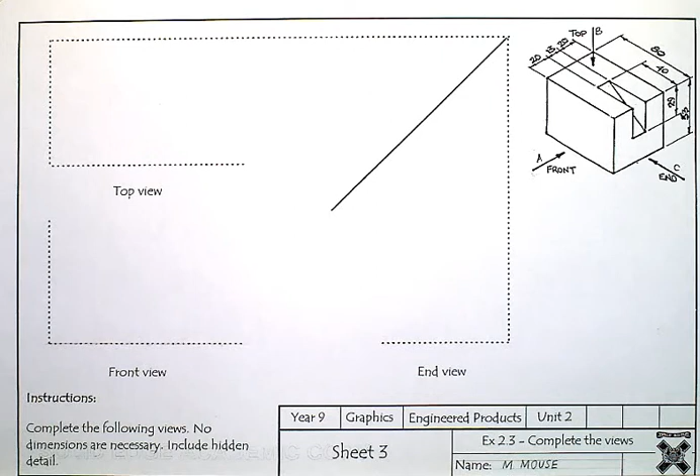Okay, this is exercise 2.3, complete the views. In this we're going to translate an isometric drawing to an orthographic drawing. Okay, a few more of the lines have been taken away. We still have some helpful hint lines there.

Okay, so first thing that's very important is have your t-square flush against the side of your board. You need to set the drawing up so all your lines line up with the t-square. That makes sure that every line that you draw will actually be parallel to the existing lines that are on there. So with that set up, I can tape that down.

I've put my name on the drawing already, and I'm going to begin to take these dimensions and place them onto an orthographic view. So here we've got a front view. This is our front view. We've got an end view looking to the right side, and it's sitting to the right, and that's your end view. And then you've got a top view, so it's looking straight down like a bird's eye view from above. So A, B, and C.

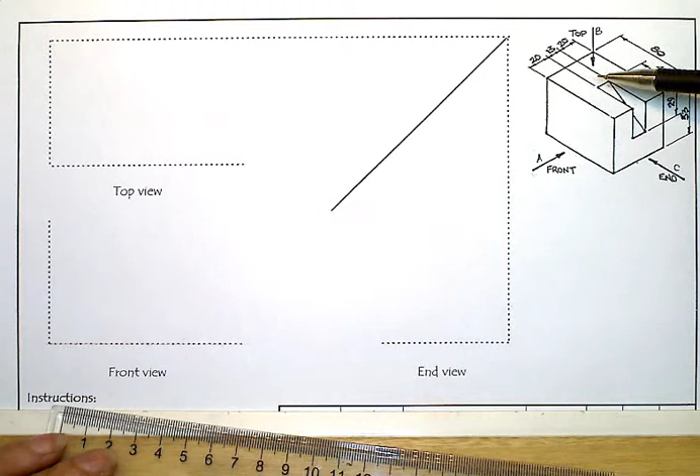We'll start with the front view, then we'll go to a top view, and then we can go to an end view, just in that order. We always start with the front view because that should give us the most information. So if you're choosing a front view, try and choose the angle of the object that will give you the most information. Okay, so the overall width of the object is 80, so the first thing I'm going to do is measure and mark out 80 along that line.

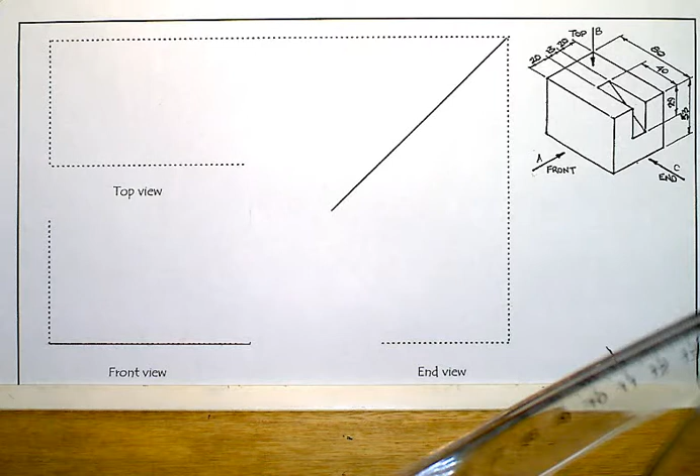Okay, I'm going to draw that line in. I can see here it's going to be a solid final line, so I'm going to just draw over that existing line. This is where it's really important that you've lined up your t-square properly with the existing dotted line that's on there. Okay, from that point, I'm going to box in the front view, just really light with construction lines.

So I'm using my 45-degree set square to give me that angle, which is going to be important later, but also the verticals I'm going to draw with that. I don't use my ruler at all. If I used my ruler, the lines would not be vertical and horizontal, you'd be able to tell.

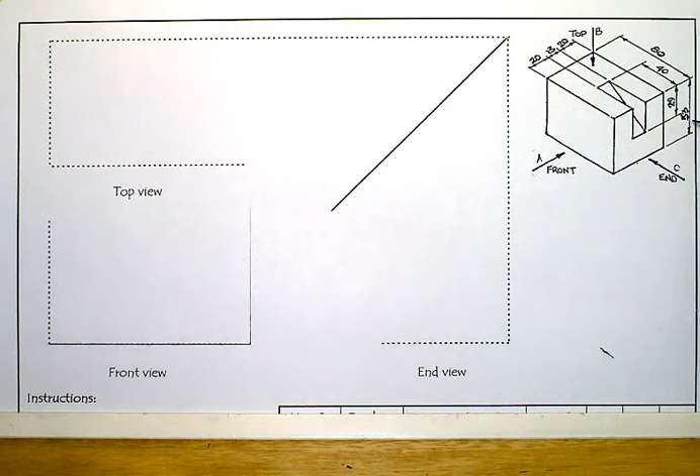Okay, so we've got that height there. We've got another height here which we might measure and mark out. The height being, I think that says 53. Okay, so let's measure and mark out 53. T-square out of the way. So 53. Making sure that's accurate. Mark that out. The light point.

T-square together with my set square, going to make that line to that point along the dotted line. Okay, so there is the edge of my drawing. All things are sitting the way they should. It just should go straight over the top of the dotted line. There we go. Okay, that's a bit better.

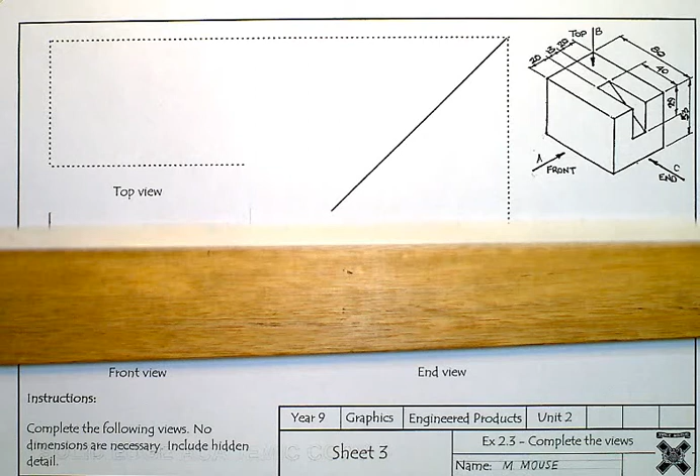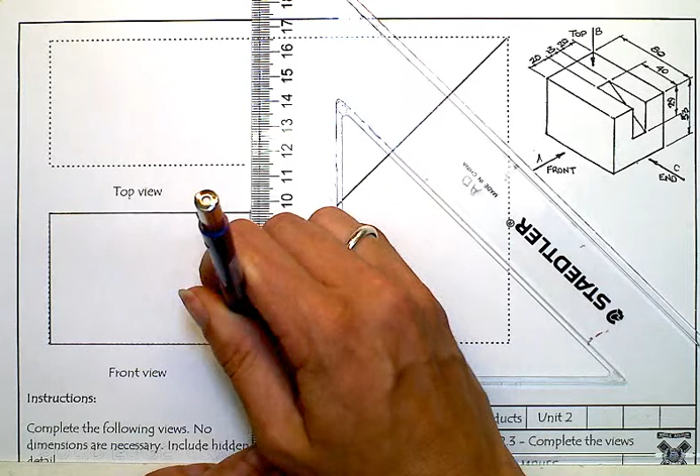Right, so I've got the height and I've got those edges there on my front view. I'm going to bring that height across. I could probably firm this in. The problem with firming in straight away is if I make a mistake, it's going to be very hard for me to go back. You're going to see everything, even if I try and rub it out. Okay, so there's my front view. You can see it's really just a very plain front view.

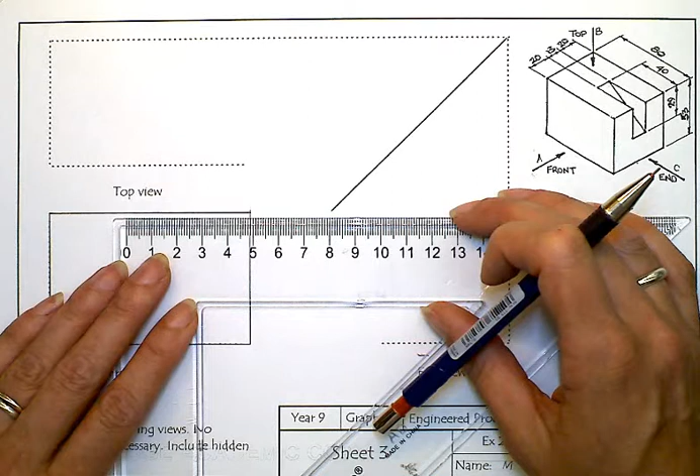The important thing that we have not yet put in is the hidden detail line, which comes across here. It's going to measure 40 across the top and 29 down the side. So we're going to measure and mark very accurately 49. Okay, and sorry, 40, my mistake. That's why you double check your measurements. 40 and 29 down the side.

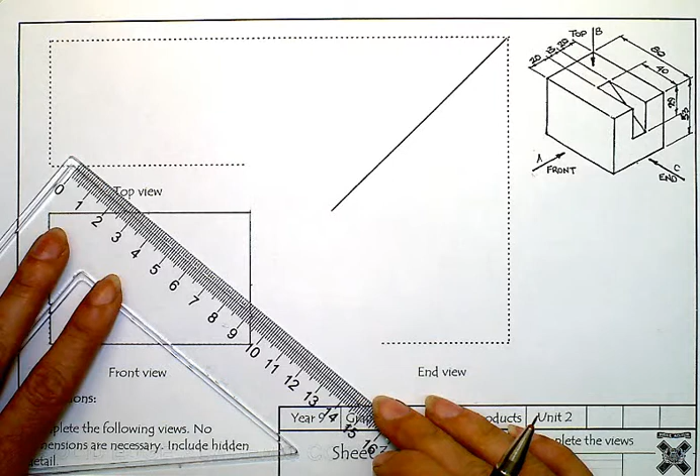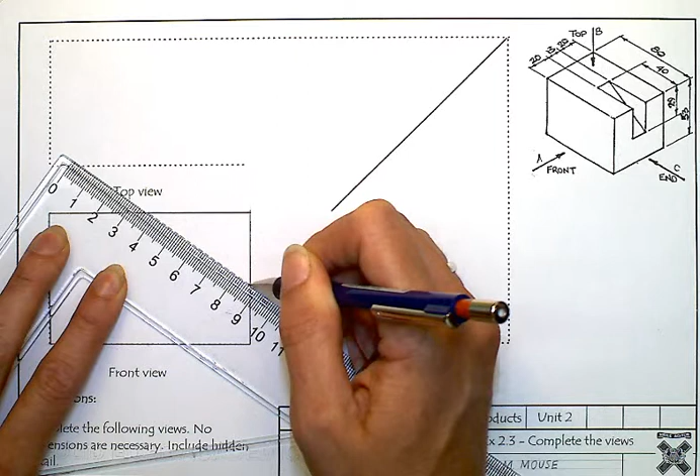Okay, now with those 2 points, I'm just going to line them up and do hidden detail. Now hidden detail is actually a lot lighter than my outline. It's sort of half the weight of my outline line. Okay, so there we go, hidden detail. Just to clean up any little stray marks there, just to keep the drawing as neat as possible. Cleaning up.

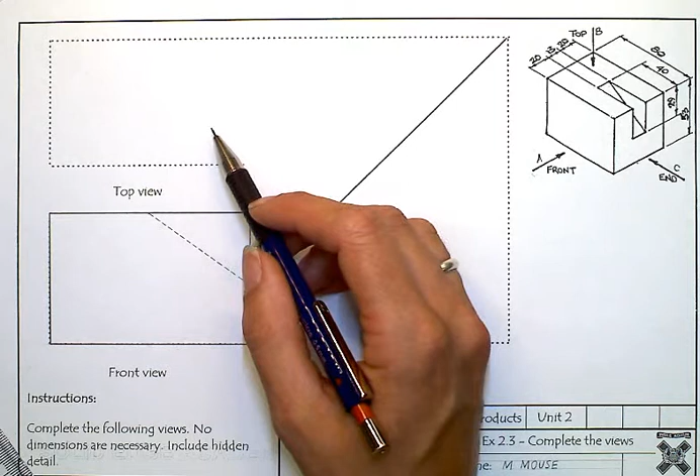So at this stage, I've got my front view. Now I'm going to translate all of these measurements onto my top view. So using t-square and set square together, I'm going to mark out the width of the top view. So it's going to be exactly as wide.

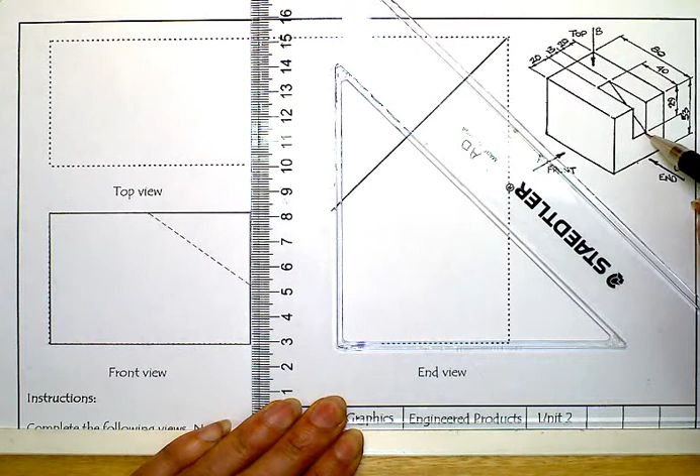I'll look at that top view. Now there's going to be a gap in the top view, but it's filled in down here, so we could probably say that's going to be firmed in. Okay, now as far as how wide it is, it's going to be just as wide as the bottom view, so

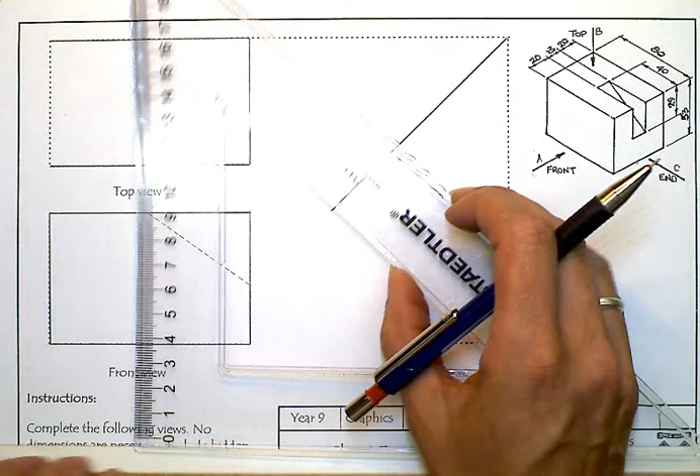firm that in. Firm in the outside edges, making sure you've got the right points. If I went out here, it would look a bit messy. It would be harder to tell where the object began and finished. So, okay, I've boxed it in. Now in this case, I've boxed it in with firm outlines because I know for a fact that that is going to be visible on the top view. I can see that there.

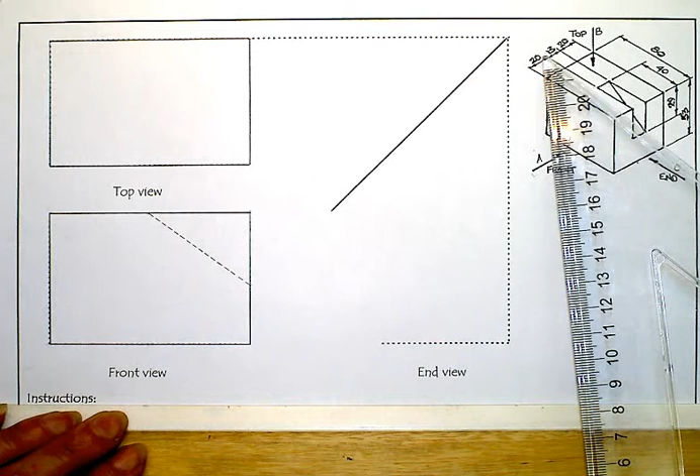Okay, now we've got a few little details that we still need to put onto the top view, such as this cutout in the middle. So we've got some measurements that we need to translate onto the side here. So we've got 20, 13, 20. So let's measure and mark that out. Okay, might do it on this end, because that's the end we need it on. So 20,

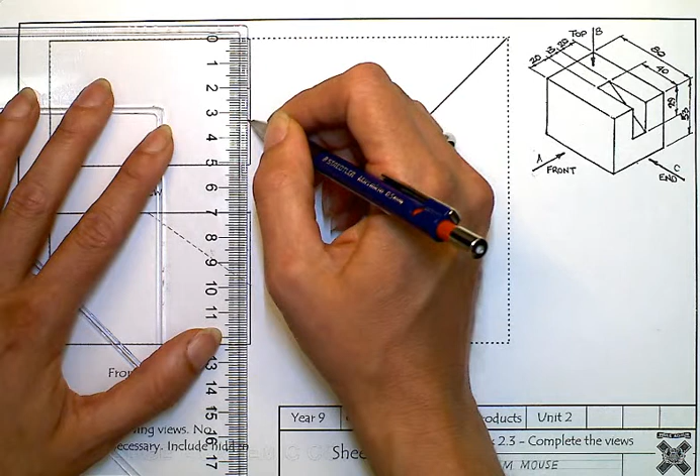mark, 13, might do 20 out from the other side, 20, and then just double check the distance in the middle, it's 13. Looks more like 11 to me, so double check that, which is interesting. 20, 13 would be more here. And then 20, okay, I'm just going to do 20 in from each edge, and the middle can be smaller.

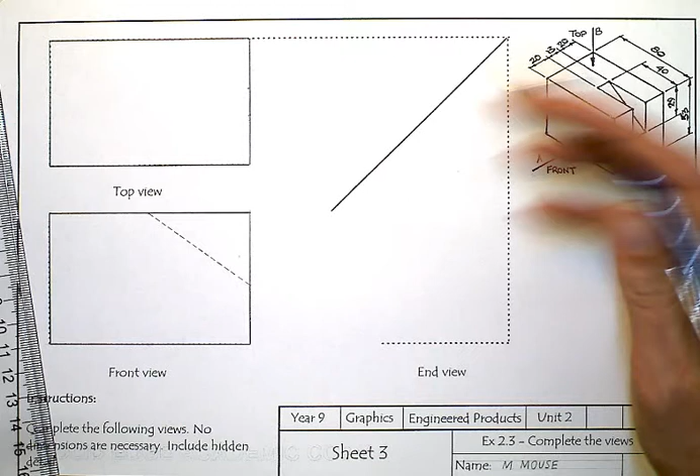Then you can see that there's actually some extra gaps going on, so the dotted lines themselves might actually be smaller than, there might have been some shrinking going on when I reproduced this picture. So that width there is not exactly the 53 that it's meant to be. If I measure that out, that's actually 51. So I'm going to have to just go with it. So that 2 is absorbed in the middle there. So, yep. All right.

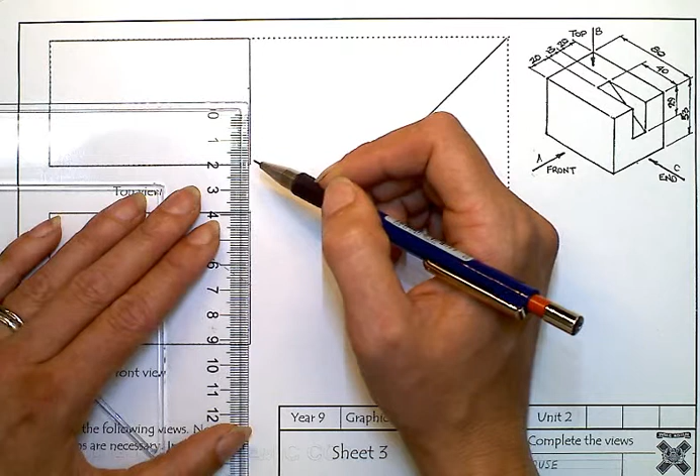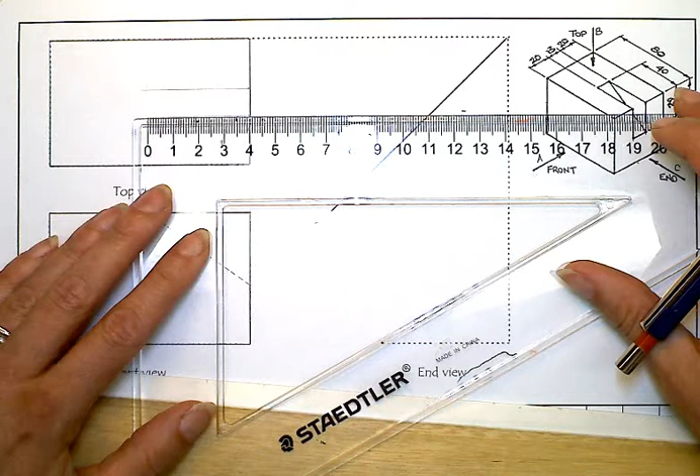I'm going to do some very light construction lines into the middle. These are going to be easy to rub out. Now, the width into the middle is 40. Okay, I'm going to keep that the same, even though I've got some shrinkage elsewhere. Okay, using the wrong set square there. Okay, going back to my 45-degree set square. Now, this one's not long enough, so I'm just going to extend that very lightly to where I think it goes. Okay, and then finish that up.

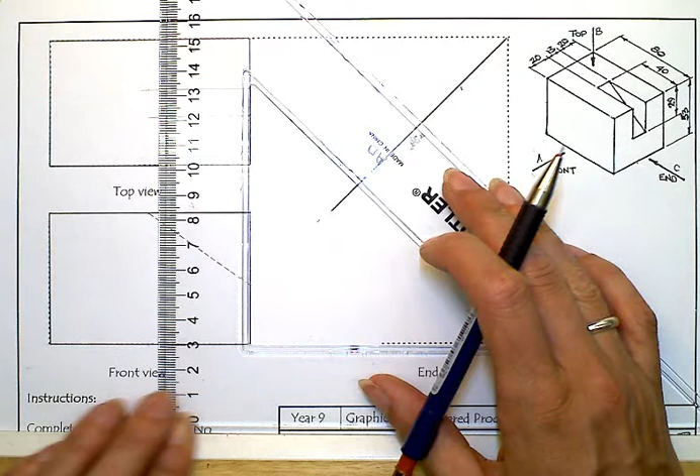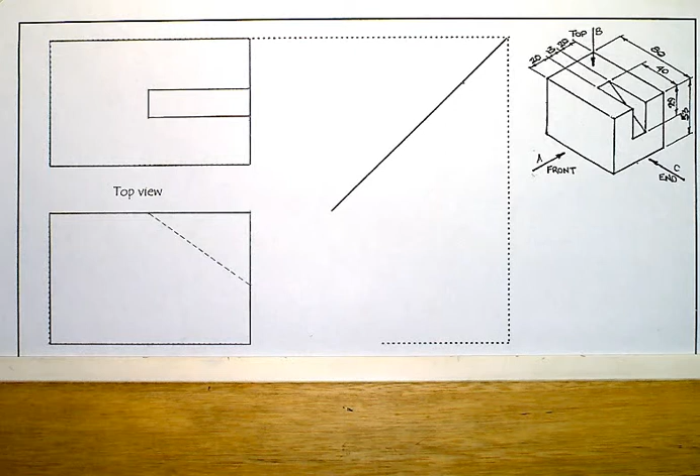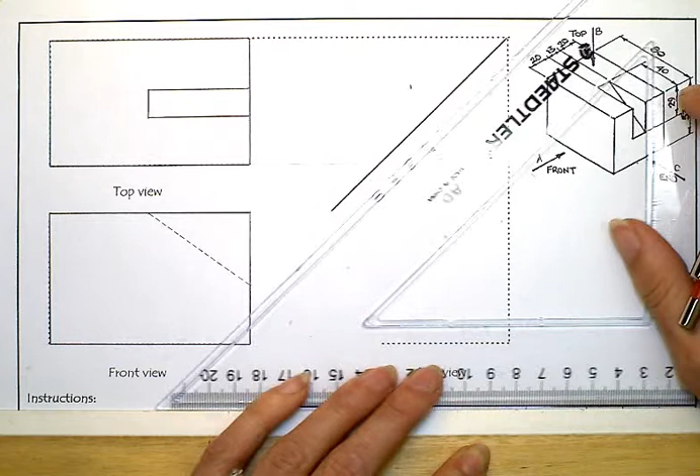Okay. Alright, now I need to firm those in before I move on. I'm happy that that's the object that I need to give outlines to. There are no hidden details on that face, on that top view. Now, in translating all of these things to your end view, okay, we're going to actually take these points across to this 45-degree angle here, and we're going to drop it straight down. Okay, just as this one is. As long as that's 45-degree angle, that's what we're working on, and you can see there it is.

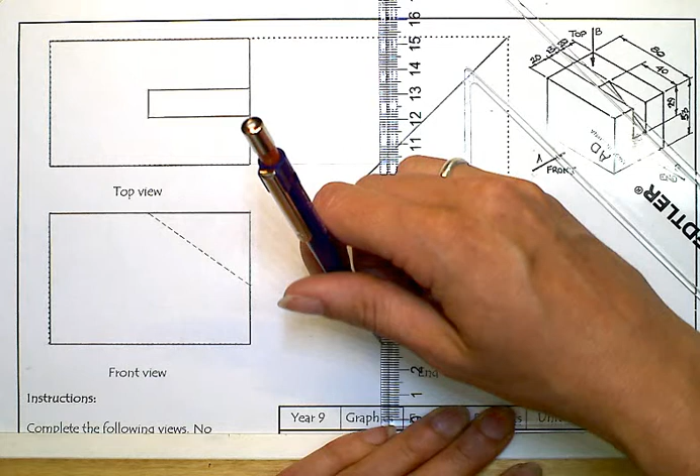Okay, so that 45-degree angle out from your top view, you can see that if I take these straight across and drop that straight down, I will have that same width on my end view. I'm also going to have the same height coming across from my front view. So same height, okay, comes across from here. Running the full height and firming in my outlines.

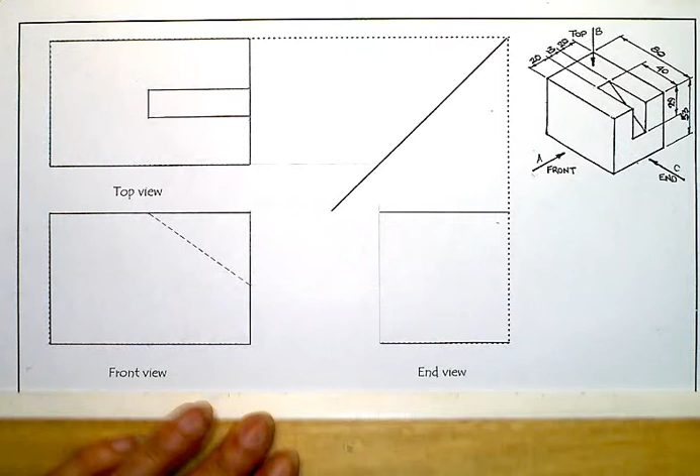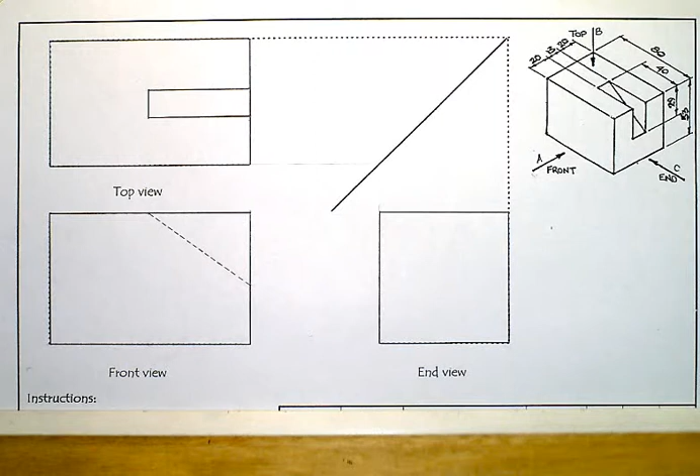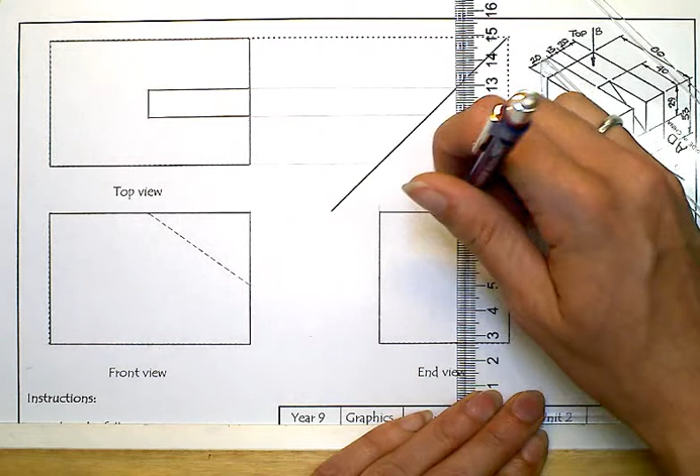Okay, we've still got a little bit of detail that we can translate across. Again, we'll use the same method because it makes life a little bit easier. It will actually sort of reduce that element of, if we have a problem here, which I did, it will at least reflect the same shape down here and no one gets confused. So that comes down, straight down, and I can just pull that shape down into there. And you can see that's going to end around about there where that comes down to. Okay, so same with this edge, pull it down into there.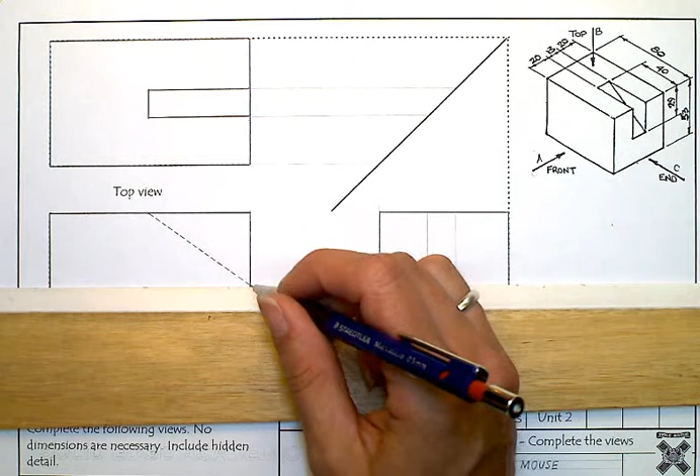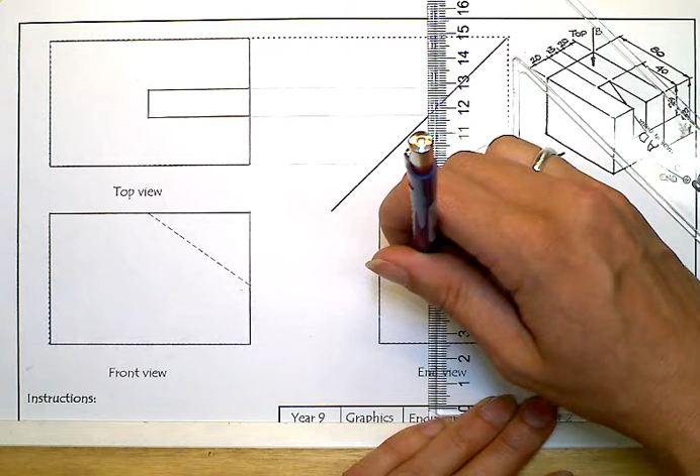Stops at that point, take that point across. Always make sure your T-square is butted up against the edge of your drawing board. If it starts getting wonky, that's when your lines can start looking a bit strange. Okay, just to finish up this drawing, making sure the corners join. And there it is, you're finished. So you've got your top view, you've got your front view, and you've got your end view. Well done.